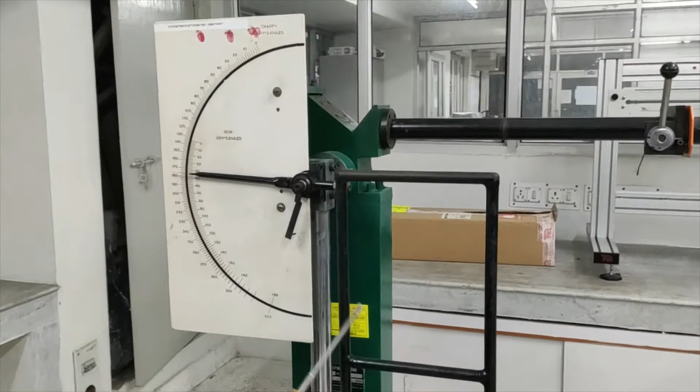So as you can see, this particular machine is called the drop weight impact testing machine. You can see this particular handle - this is a kind of a very heavy hammer, and once we take this hammer to this position and then leave it in free air, that's why it is called the drop weight impact testing machine.

The main purpose of this particular machine is to measure the toughness of a particular material. Now, unfortunately, the word toughness may not be something students get exposed to in the strength of materials course, but definitely it comes into the picture in material science. And this is also equipment which is extensively used in the industry.

Though this toughness is not exactly an exact material property like Young's modulus and shear modulus of elasticity, it does give a type of measure - that is, the amount of energy that a material can absorb before getting broken into two pieces. That's what toughness is.

That means if a material takes up a large amount of energy before fracturing or breaking into two pieces, it means that particular material has a very high toughness value. And if a material can store only a little amount of energy before getting fractured, then we say it has a low amount of toughness.

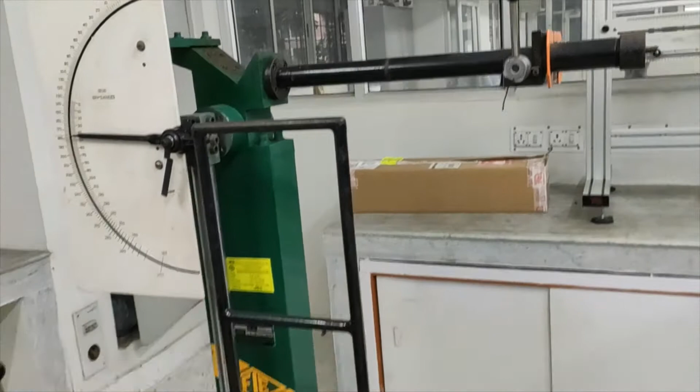Because once I leave the hammer from this particular location, it will go and strike the specimen, and therefore this becomes an impact load.

For example, car bumpers - when they hit something during an accident, we can find out the toughness values of the bumpers using this particular machine, because the load that comes at the moment of accidents is also an impact load. Once we know the toughness value of that particular material, we can design in a much better manner and give safety to the riders also.

So in this particular test machine, we have two kinds of tests, variants - that is Charpy and Izod tests. Both are actually meant for the same purpose.

What we do is, to fracture it very easily, we take the specimen - you know very well, a very classical example is if you go to the market and want to cut a piece of glass from a big sheet. So how does the workman do it?

He will actually take a pen kind of thing and mark on the glass. That marking creates a small crack on the glass, and then he simply breaks it with the help of his own hand. So without marking using that particular diamond pen, if you try to break the glass, it becomes very, very difficult. In a similar way, to break the materials easily for the specimens of this impact testing machine, we create some notches - a V notch and U notch.

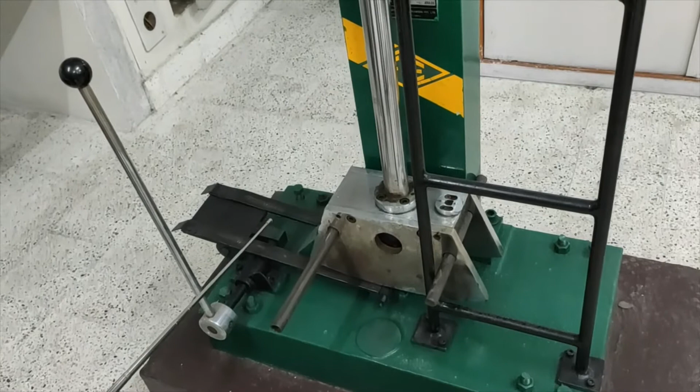So what we do is, we keep the specimens over here in this location in the Izod and Charpy test, and then we bring this particular hammer to this position, and release this hammer in free air. This hammer comes and hits the specimen, and the specimen breaks into two pieces, and from this particular scale we can measure the amount of energy that is stored just before the fracture, until the fracture, and that gives the value of the toughness of the material.

And it is extremely useful to compare between different materials. Though this toughness value cannot be directly used in the design calculations, they will be extremely useful when I want to compare different materials. And that's why these machines are extensively used in the industry as well.

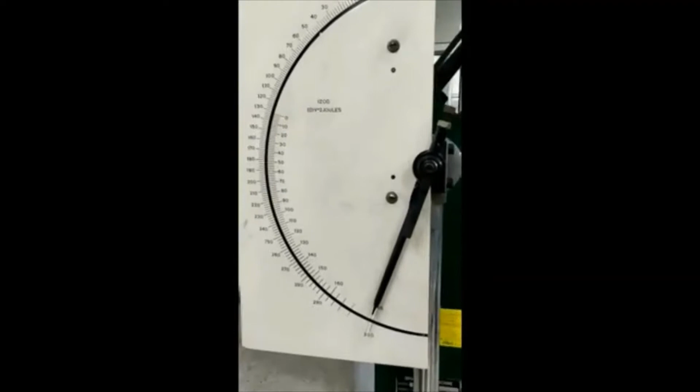In this machine you have seen the dial indicator and the pointer. Here, for Charpy, the outer scribed scale is the Charpy impact test scale, and the inner scribed scale is the Izod scale values.

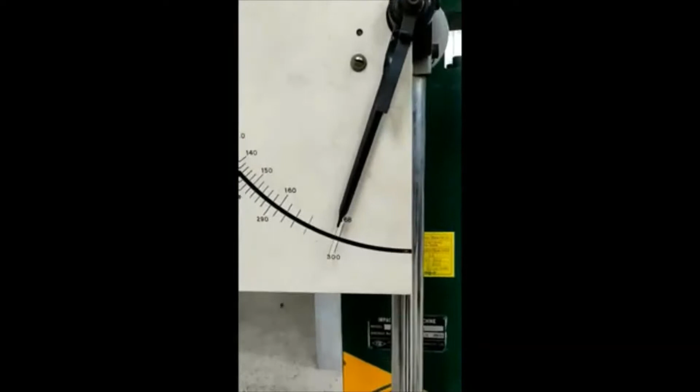In the Izod impact test, 1 division equals 2 joules, and this is the pointer. For Charpy also, 1 division equals 2 joules. For Charpy, full scale is 300 joules, and for Izod it is 168 joules.

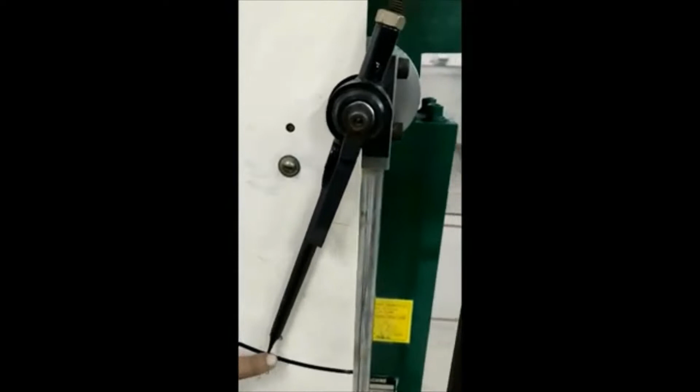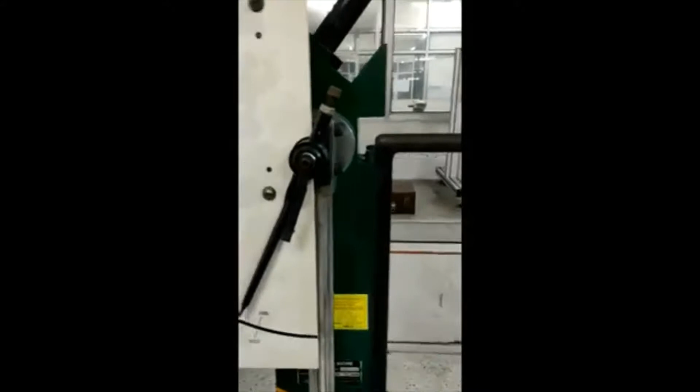This outer scribed scale is for the Charpy impact test, with full scale 300 joules. For Izod, this scale goes 0 to 168, with full scale 168 joules, while for Charpy full scale is 300. So this is the impact testing machine.

This is the latching tube. The tube and the center axis of this impact testing machine, where we place our specimen, makes an angle of 141 degrees, 44 minutes, 14 seconds. And this is the brake.

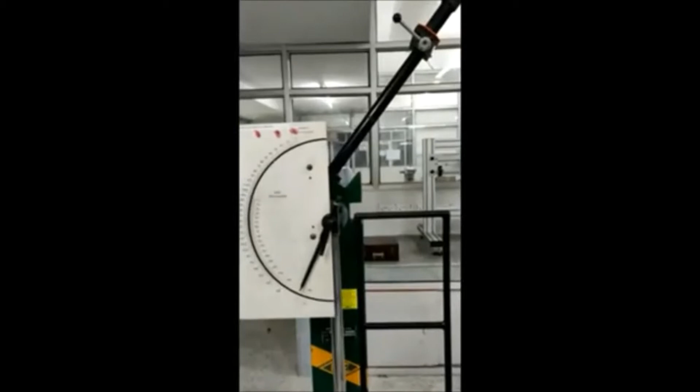This machine works under the principle of potential energy stored inside the hammer. Once you release the hammer, potential energy is converted to kinetic energy, and that kinetic energy is used for breaking the specimen.

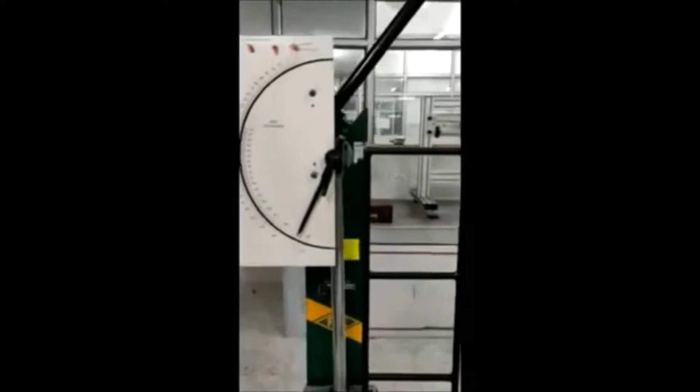Let's see first - the hammer is now in rest position, a stable position. Now we will put the hammer in position, and bring the hammer up.

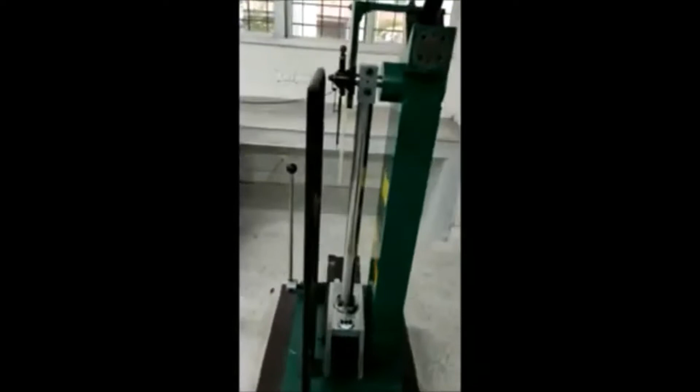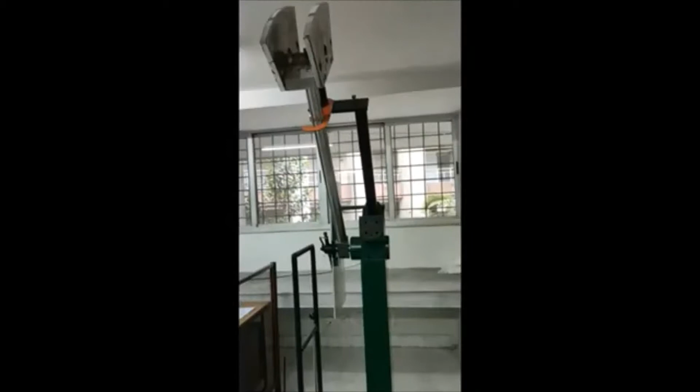We will bring this hammer to the top position and fix it there. Let me show you how I am making it. I am bringing this hammer and putting it in the topmost position by lifting it. Once I put it here, it automatically keeps fixed, and this is the safety handle. Now the hammer is in the topmost position.

Now this machine is ready for conducting the Charpy impact test. So how do we perform the Charpy impact test? This is the first step. Second step, we will put the specimen.

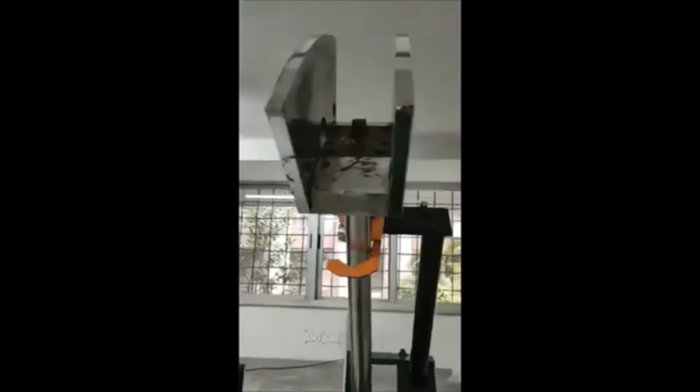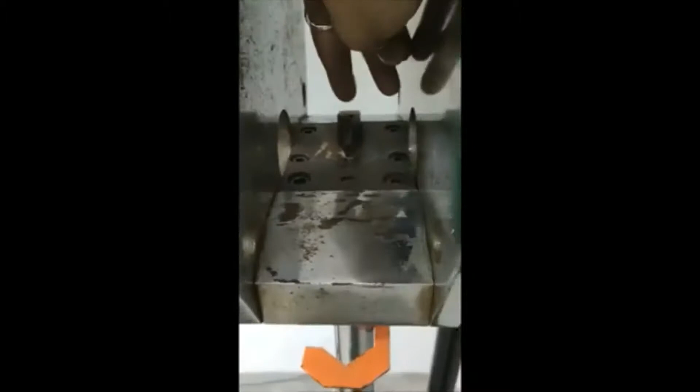Before putting the specimen, you need to see some other things, like this - this is called the striker. This is tapered, and this is the pointed striker. Both sides are tapered. The striker can be taken out. For the Charpy impact test, this is the striker. For the Izod impact test, the striker will be different - that will also be shown. This striker is attached to the hammer.

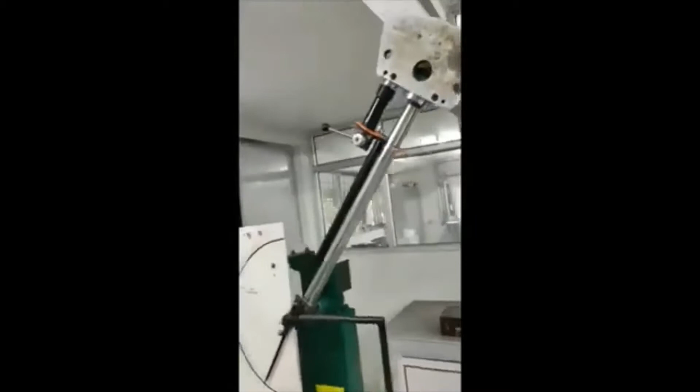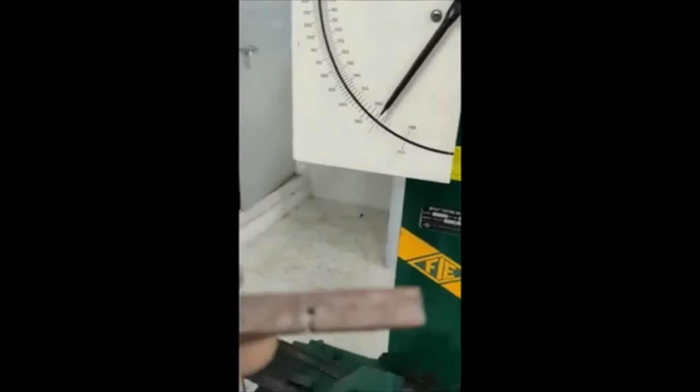Now we can go for fixing the specimen. For fixing the specimen, you need to go to the bottommost position of the setup. So this is your specimen. Just check, this is your specimen.

This is the specimen. There is some rusting because these specimens have been kept since last year. So this is our specimen.

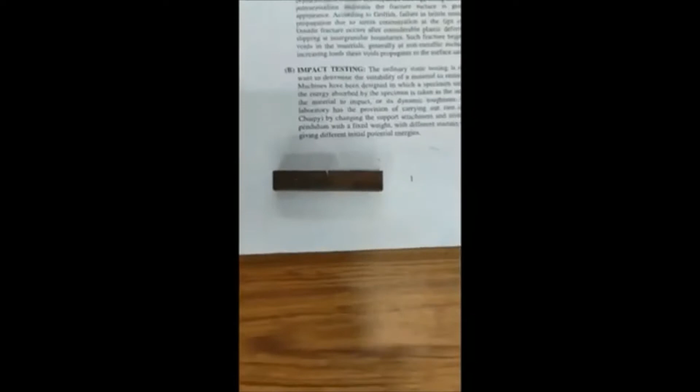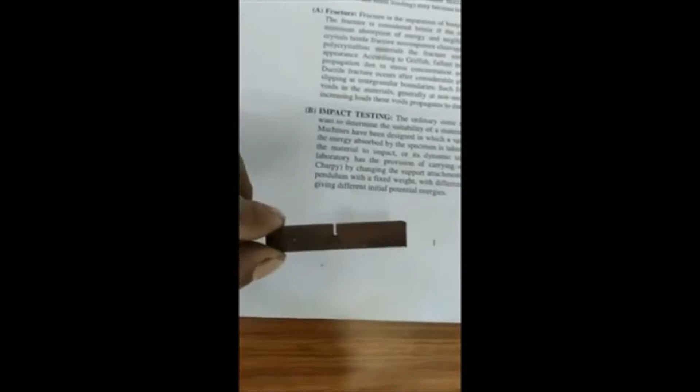In this specimen, one notch is there in the center. This is the notch - this is called a U-shaped notch, or U notch. In both Charpy and Izod impact tests, there will be a notch on the specimen.

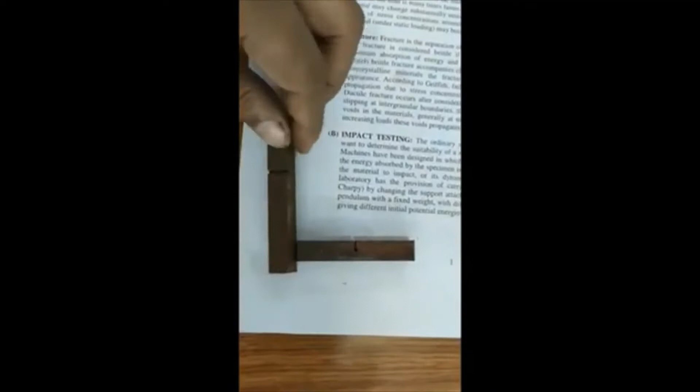For the Izod specimen, this is the notch. For the Charpy specimen, this is the notch. The notch can be either a U notch or a V notch. So the notch geometry, where to put the notch, and the specimen geometry are all specified here.

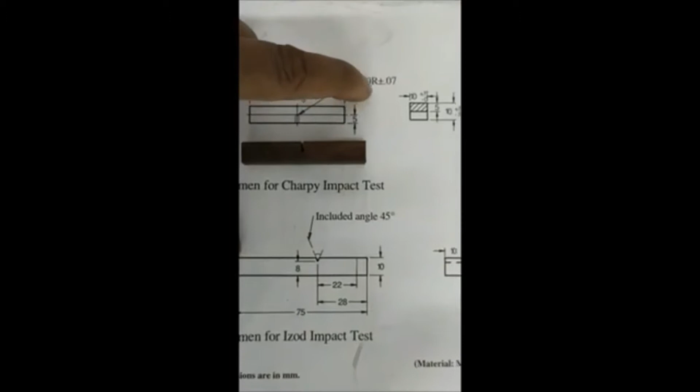This is the specimen geometry. For Charpy, the specimen length is 55 plus minus 0.6 mm, and the notch geometry has a 1 mm root radius plus minus 0.07 mm. This notch should be made on a milling machine. The width and thickness of the specimen is 10 mm by 10 mm, length 55 mm, and the notch geometry is as shown.

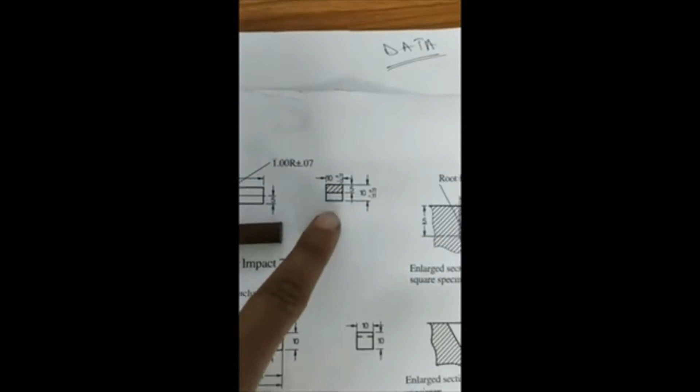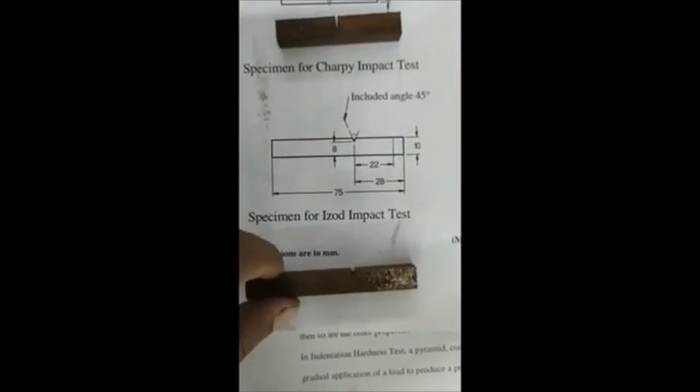This is the notch geometry, clearly mentioned. This is the notch for Izod. This is the specimen, and this is the specimen dimension details and notch geometry.

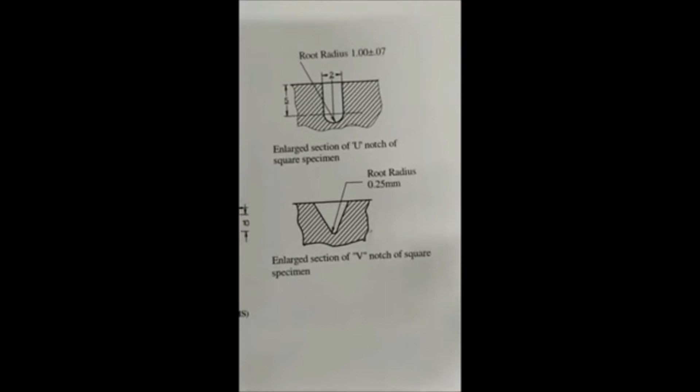The notch angle is 45 degrees. This is the geometry - root radius for Izod is 0.25 mm, and for Charpy it is 1 plus minus 0.07 mm. Everything will be given to you as a soft copy as well as in video, and we will provide you this manual copy so that you can easily understand.

Now this specimen we will put on our impact testing machine for Charpy impact test. First we will perform the Charpy impact test. Machine is ready for Charpy impact test.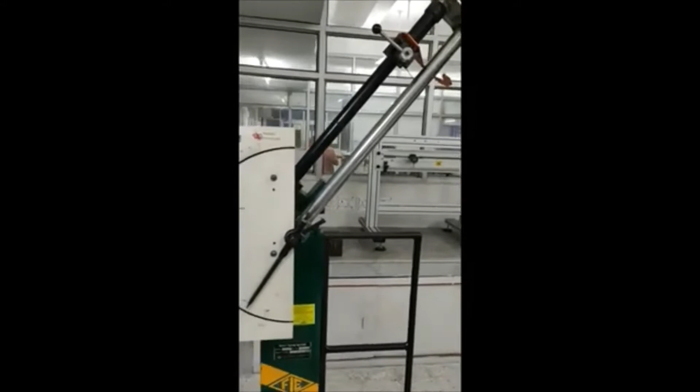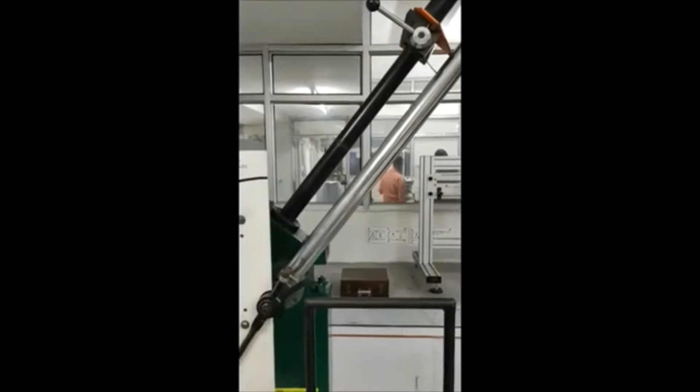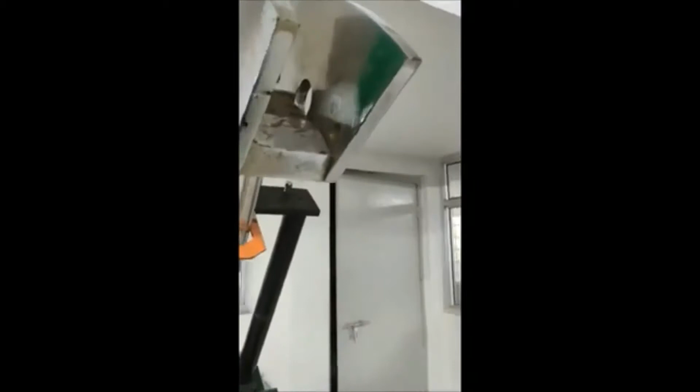For Izod impact test, we need to change the hammer position. Now hammer position is 141 degrees, 44 minutes, 14 seconds, as I told earlier. But for Izod, we need to change this hammer position to almost 90 degrees. For that, this tube we need to put and fix it here. Fix it here, then hammer will be positioned like this, horizontal. Now it is in angular direction, it will become horizontal. Then we also need to change the striker for Izod.

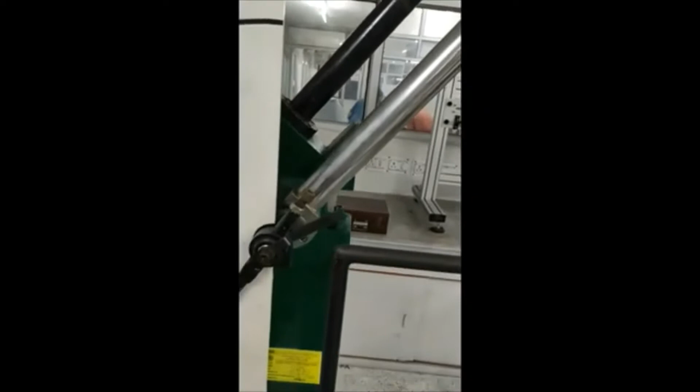As machine is ready for Charpy impact test, we will perform it right now. How to perform it already I have explained. Now we will go for fixing the specimen. For fixing, we will hold like this, and the striker will strike exactly behind this notch. Specimen we will put like this. So notch is here, facing frontward direction, and striker will directly strike exactly behind this notch.

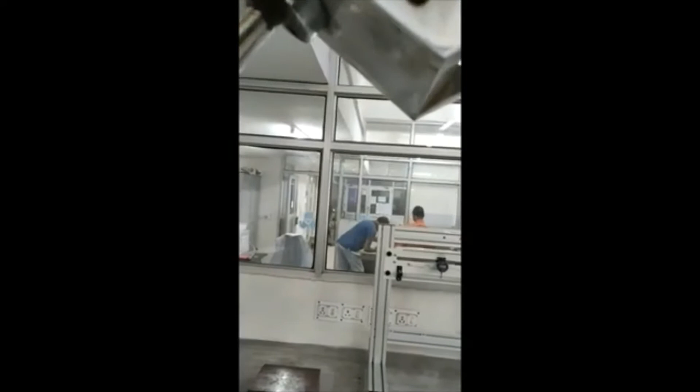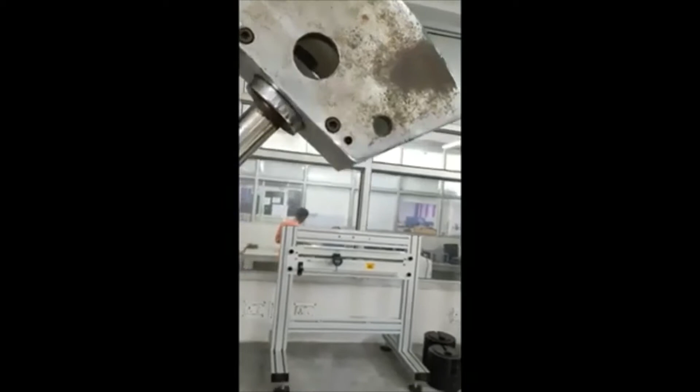Now we will go for releasing the hammer. The weight of the hammer is around 21.5 kg, and we know the height. So this hammer has potential energy stored within it. If we release this hammer, this potential energy will be converted to kinetic energy, and that energy will be used for breaking and striking this material. Then we will find out the toughness of the material, how much energy is absorbed while fracturing the material.

Why is a notch provided? So that the specimen breaks through the notch point. Otherwise the specimen may not fracture, it will directly get bent. You will get some idea once we perform the test, how to measure the toughness of material.

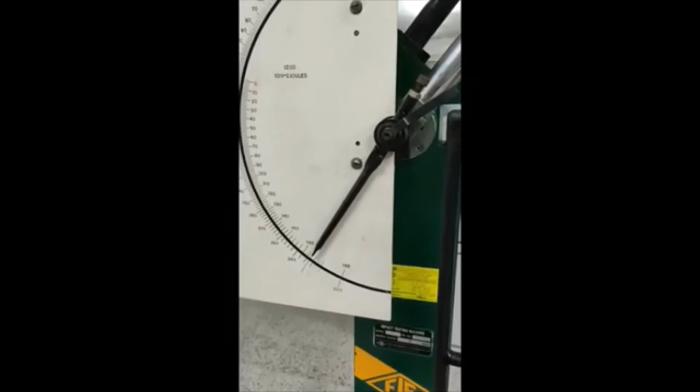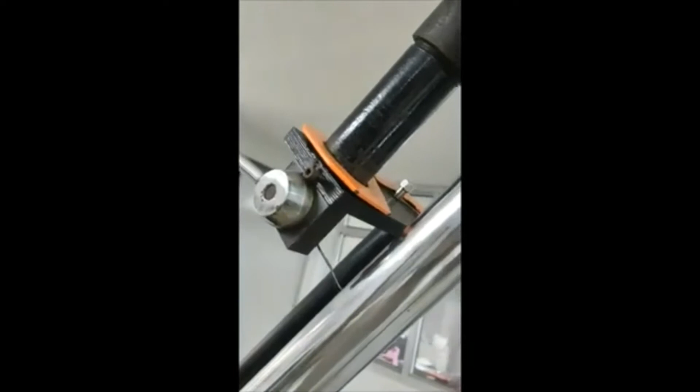Now I am going to release the hammer. For releasing the hammer, you need to place this safety handle in its position. Now hammer is ready to release. This is the hammer releasing lever. We will release this lever. Then the hammer will swing and fall, and while swinging it will strike the sample exactly behind this notch.

Then the specimen will get split into two pieces. If it is ductile material, it may just fracture or show some deformation before failure. And if it is brittle material, then it will completely become two pieces.

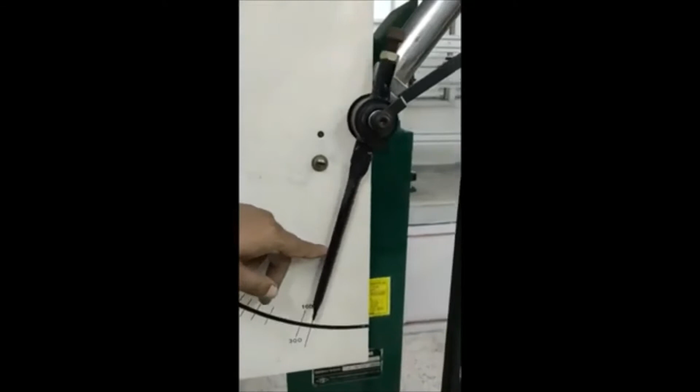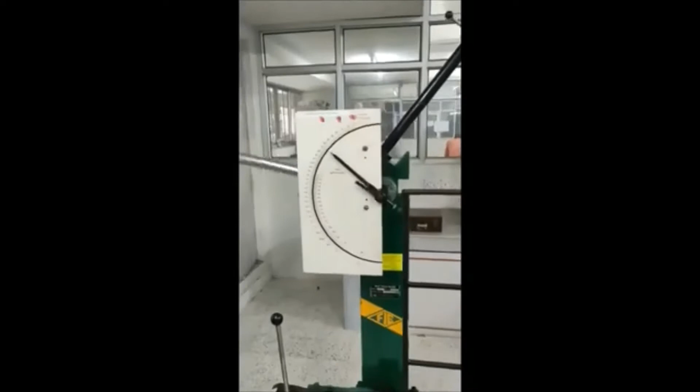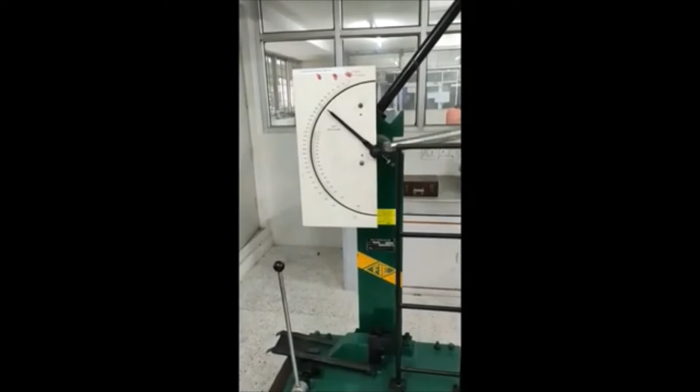Now I will place this pointer here. I place this pointer. Now I will release the hammer. I am going to release the hammer. Once I release it, the hammer is swinging and it will strike. It has already struck the material and the specimen has failed. The specimen becomes two parts through the notch.

Now we need to stop the hammer, as it is still swinging. Since this experiment is a little bit dangerous, protective barricades are given. So now we will apply this brake. This brake we will use. Then the hammer will be stopped. So the hammer is stopped now.

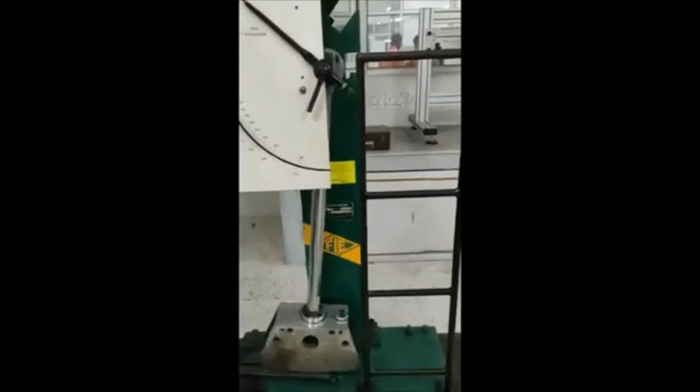Now we will measure how much energy it absorbed while fracturing the material. You count from 0, 1 division equals 2 joules. This is 2 joules, 1 division 2 joules. 4, 6, 8, 10 joules - this one is 10 joules, and here you can read it directly. This is 60 joules, 62, 64, 66 joules. Almost 66 joules of energy absorbed by this material.

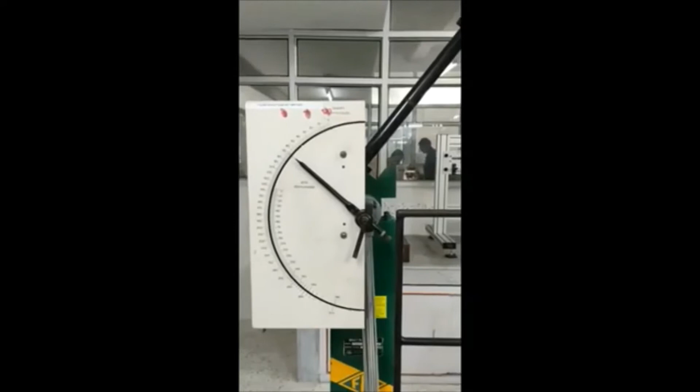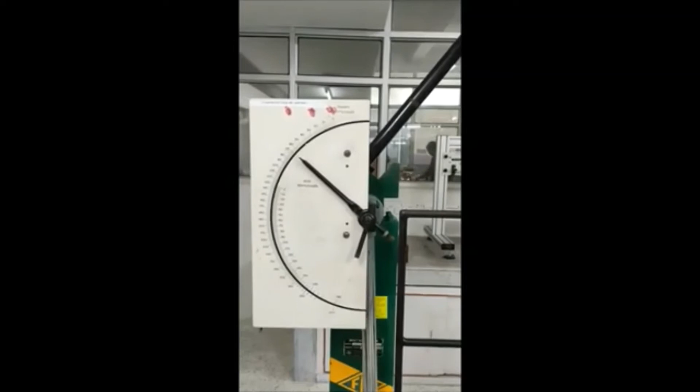This way we need to perform the Charpy impact test under different conditions like temperature and weather, cold conditions. If we keep the material at low temperature below a certain degree Celsius, will the toughness change or not? At high temperature it may take more load; at low temperature it may take less load. So at different conditions we can perform the test.

This is normal room temperature we have performed this test at, but in this machine a specific environment temperature chamber is not available, so we have to perform it at normal room temperature only.

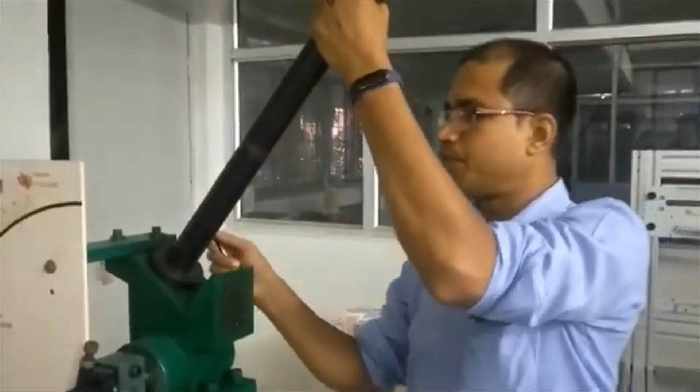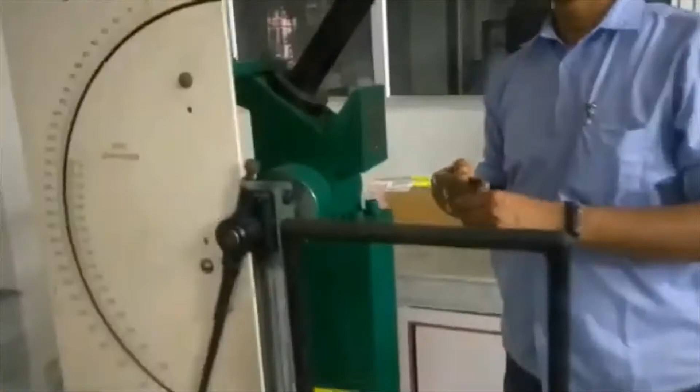Next I will show you the Izod impact test. Since this configuration is for Izod impact test, and we have already performed the Charpy impact test, now this tube needs to be placed at this position to change the impact energy. This angle will be around 90 degrees. So we need to loosen these Allen screws, take these things out, and then only we can proceed.

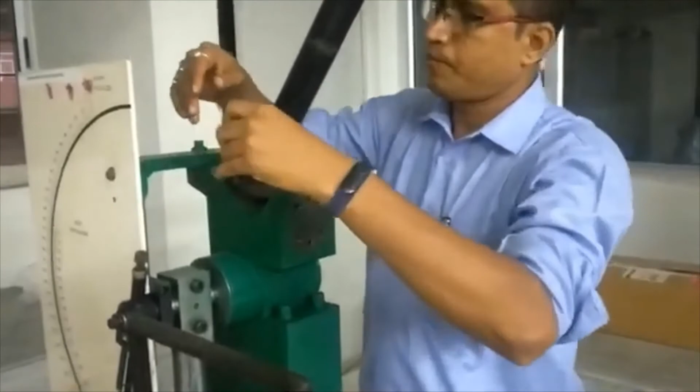Now we will remove this tube and insert it here. After putting it in place, we need to fix these Allen screws and tighten them.

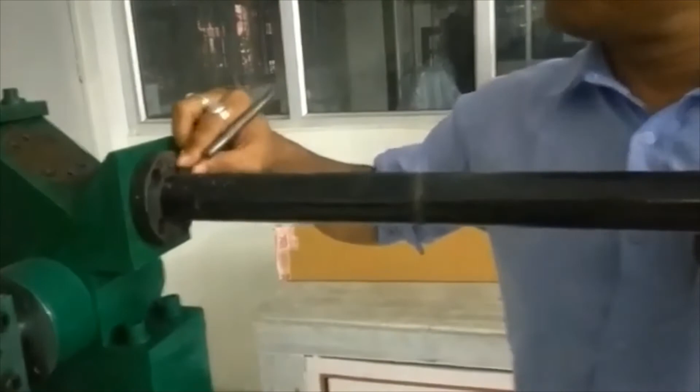Impact testing machine is ready for Izod impact test. This is the swinging hammer. We will place this hammer in this position, then put this safety handle, then place this pointer.

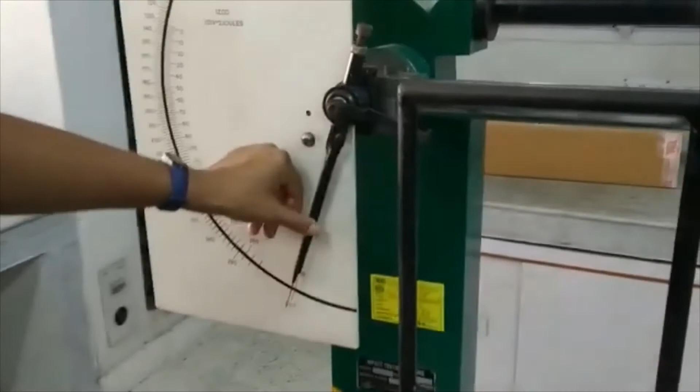Izod full scale is 168 joules, per division equal to 2 joules. Inside scale is the Izod scale, so we will put it here at 168. This pointer we will put here.

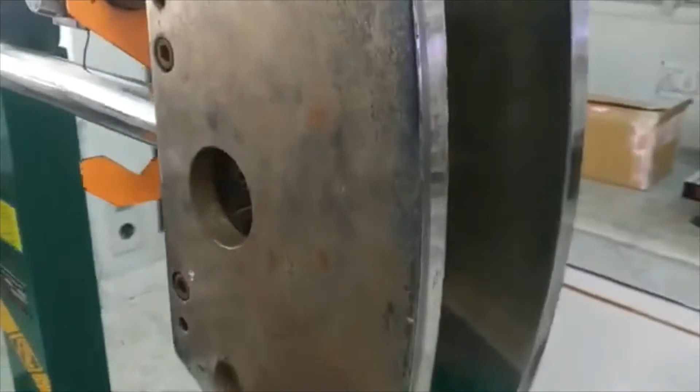Now we will show you the striker. This is called the striker, different from the Charpy impact test. This is called the Izod impact striker.

This is our specimen, our material. This length is 75 mm. This is the specimen, 75 mm, 10 by 10 width and thickness, and this is the notch.

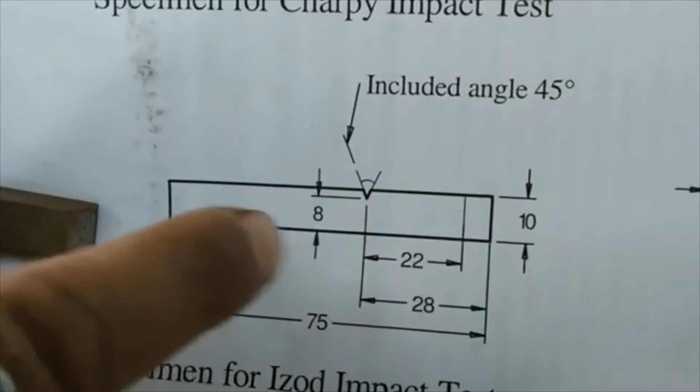This is a V notch, the notch geometry. Included angle 45 degrees, depth of this notch 2 mm, and from notch position to the top length is 28. The striker will strike in front of this notch, 6 mm below the top. That means 28 minus 22 equals 6 mm below where the striker will strike.

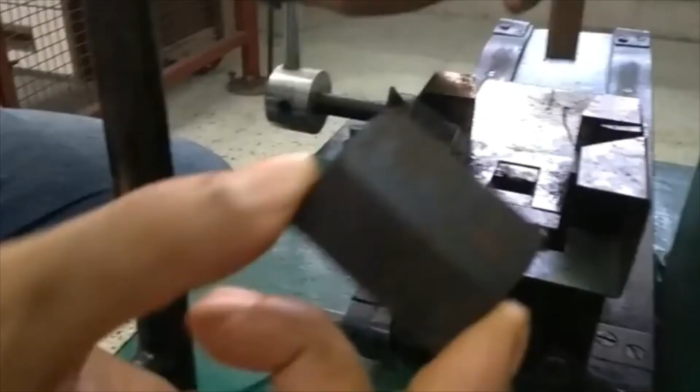Now we will place the specimen in this template. We insert it through this V notch. Then this Allen screw is available for tightening, to properly hold the specimen in position.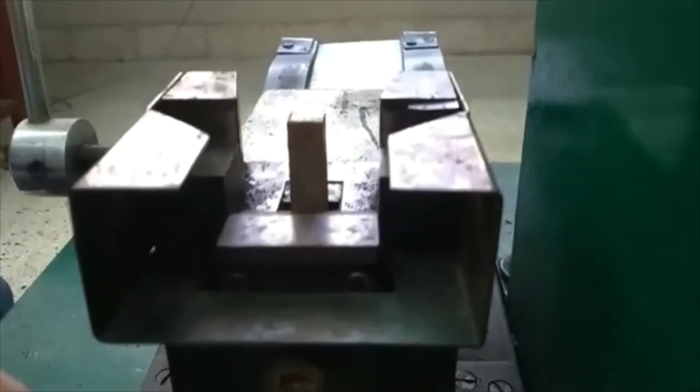Now we will tighten it with this Allen key. After tightening, we will take this template out, and now we will go for striking the specimen with the swinging hammer.

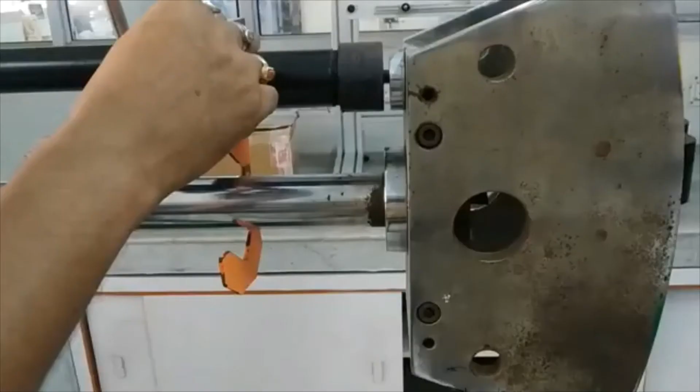Now let us remove this safety handle. During the sample fixing time, this handle should be kept here, otherwise some accident may happen. That's why we should keep it, and during testing you will just take it out or remove it.

Then everything you keep at this angle position. Hammer striker into the sample axis, its angle is 90 degrees.

Now let us release the hammer. So we will release the hammer.

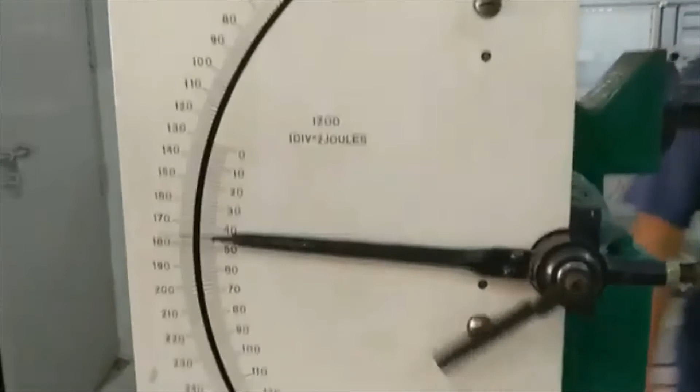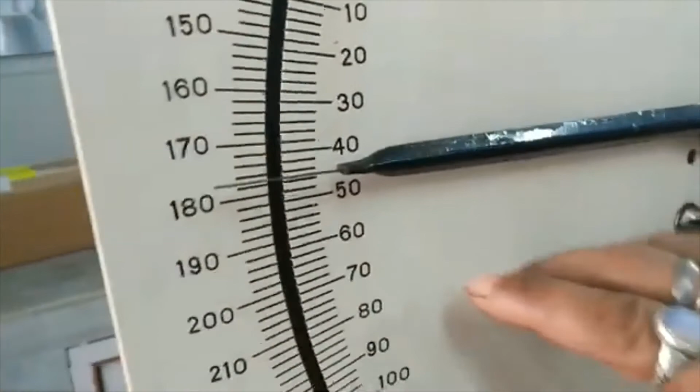So now we have seen the hammer impact the specimen, and the specimen got hit. The specimen broke. So how much energy was absorbed, you can see directly from this dial gauge. The pointer shows clearly around 40, 42, around 44 joules. 44 joules energy absorbed. Now we will remove the specimen.

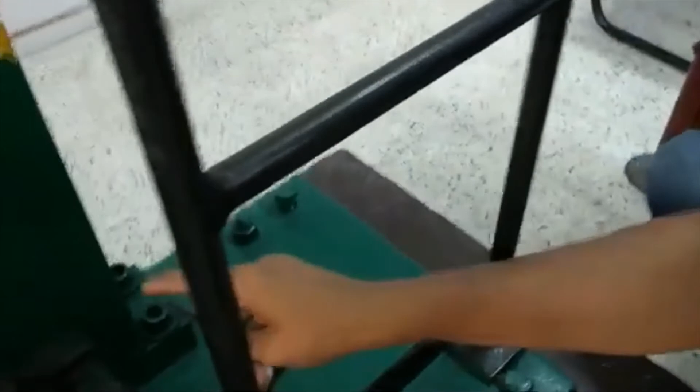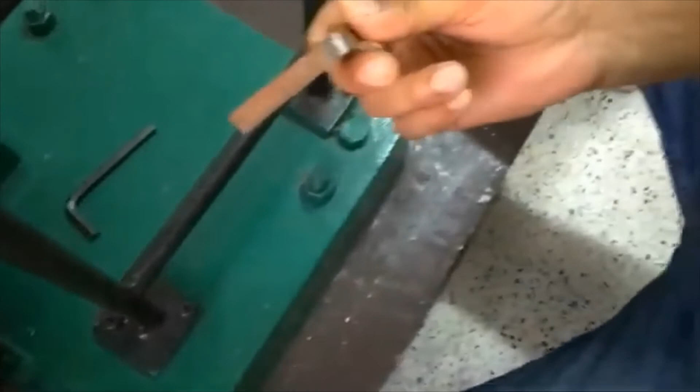For removing the specimen, again you need to loosen this Allen screw with the Allen key, then take out the specimen. So this is the material. It broke at this point.

So now the Charpy test is over. The rest of the calculations you need to do.

So we will provide you a manual here, with specimen geometry and all the theory. These details will be provided, and some quiz questions are there. You need to write your answers and calculations. So we will provide you this type of manual, where everything will be given in detail, and this type of table will be provided.

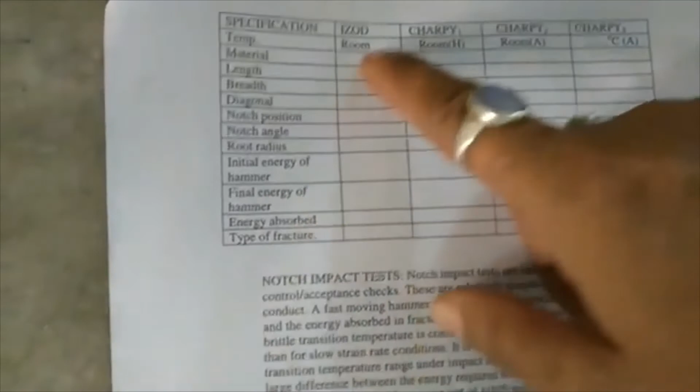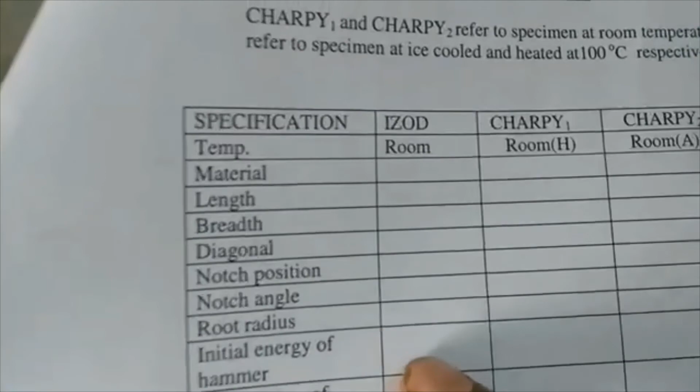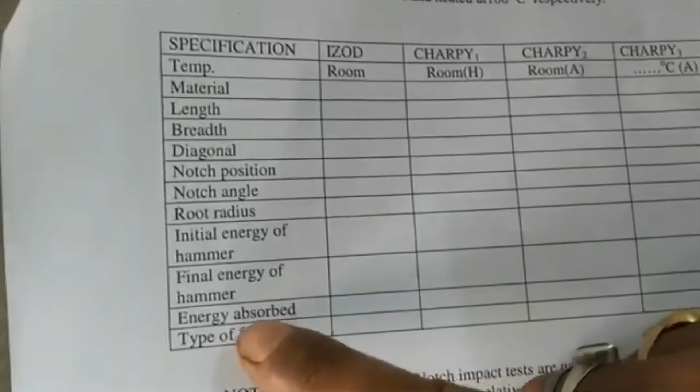Here, as per this table, you need to write the sample details, sample geometry, notch position, everything. Initial energy of hammer for Izod is 168 joules. Final energy of hammer, you will get from the energy absorbed. How much energy absorbed? 44 joules we have got. So initial energy of hammer minus energy absorbed equals final energy of hammer, which you need to write here.

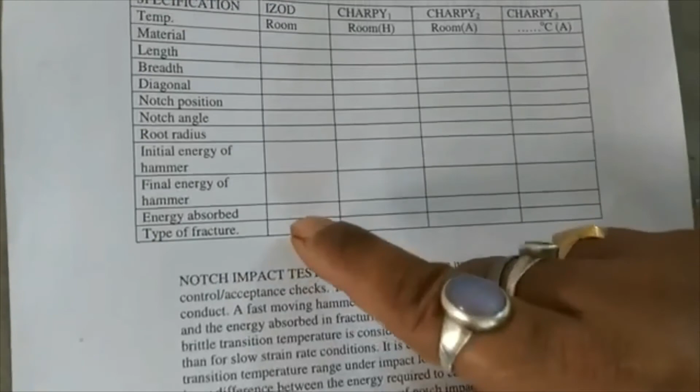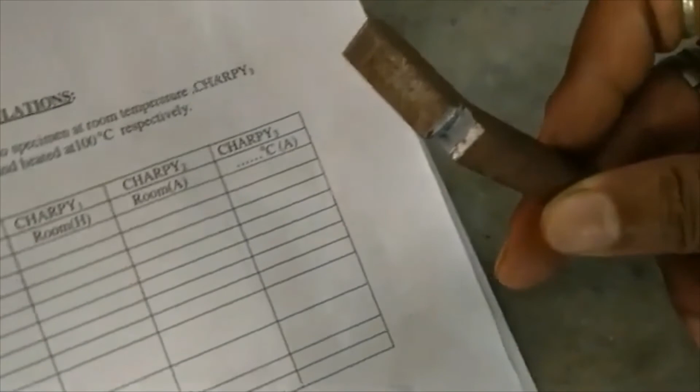For studying and getting the type of fracture, you need to look at it by eye, or study further under a microscope, then only will you actually know what type of fracture happens - ductile fracture, brittle fracture, or some other type. So you can write whether it is a brittle fracture or ductile fracture, depending upon the observation in the microscope.

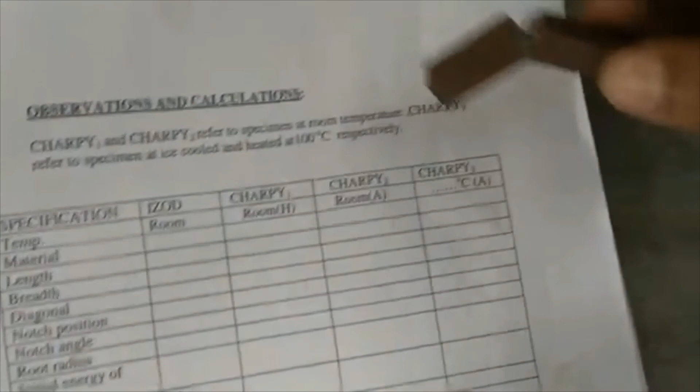So this is the experiment. For Charpy also, in this same way, you need to put your readings and do the rest of the calculations.

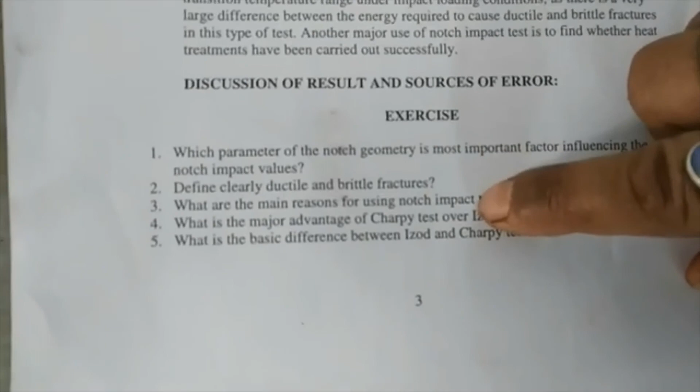These are some questions, exercises. So here you need to answer all those things.